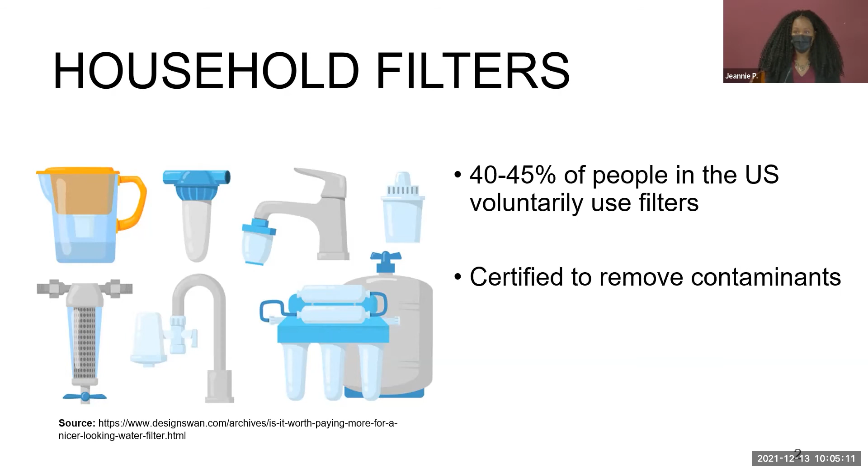They are certified to remove contaminants under NSF ANSI 42 for aesthetic effects. You will find iron and manganese under those, as well as chlorine. NSF ANSI 53 is certified for health effects, and lead certification is under NSF ANSI 53. For lead remediation, these POUs are used.

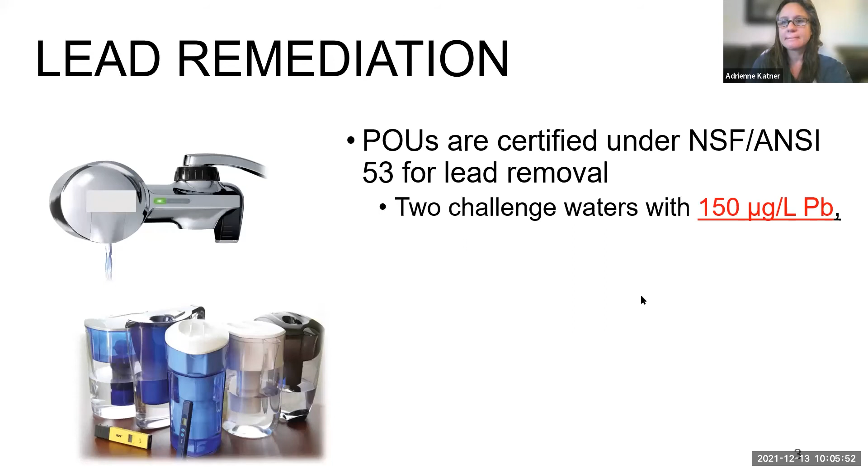All right, great. So our NSF ANSI 53 filters are for lead removal. They are tested with 2 challenge waters with 150 micrograms per liter of lead, a soluble and particulate condition. And these filters must remove... well, let's see.

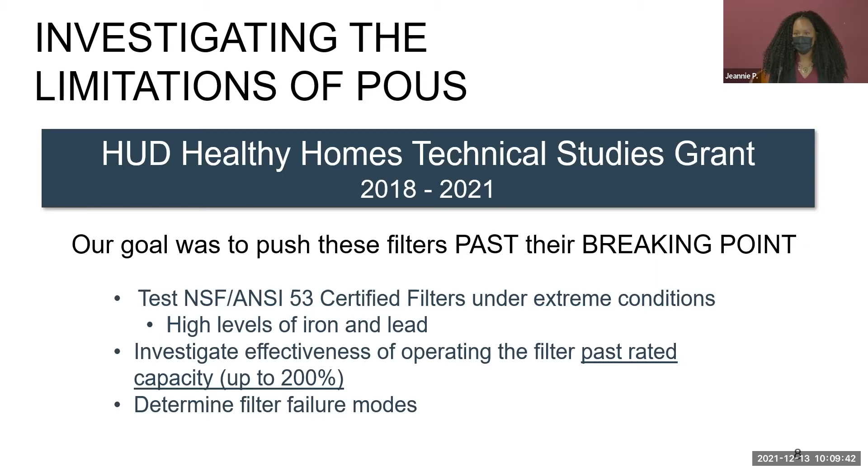Our testing was to test these filters under extreme conditions with high levels of iron and lead. We wanted to see their effectiveness when operated past their capacity, up to 200%, because people don't often change their filters on time, and to determine what the filter failure modes were when they are pushed purposely past their breaking point.

That was anticipatory because in 2019, after we had begun this work, Newark, New Jersey had a problem with unreliable filters. The EPA required them to switch from their 40,000 distributed filters to bottled water because two filters had elevated lead levels in a preliminary study. However, this was premature: when they did a citywide test of 198 homes, only 5 had elevated lead levels. So most filters worked, but residents had already been told not to trust them.

So there are ramifications when setting expectations for filter use. All these strategies for lead remediation have limitations, and my whole dissertation seeks to identify them. My first manuscript is understanding filter failure modes.

This investigation looked at when these point-of-use filters occasionally exceeded 10 micrograms per liter. My second manuscript looked at the impact of iron on POU performance, evaluating the limitations iron puts on these filters, especially when lead co-occurs in drinking water.

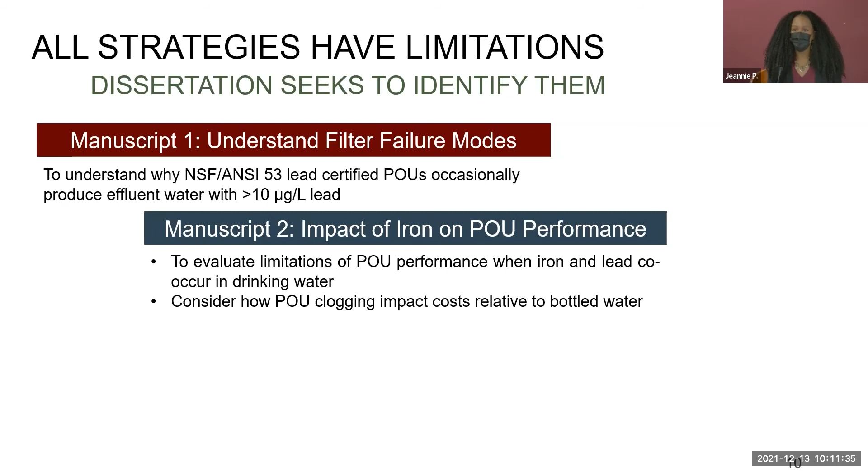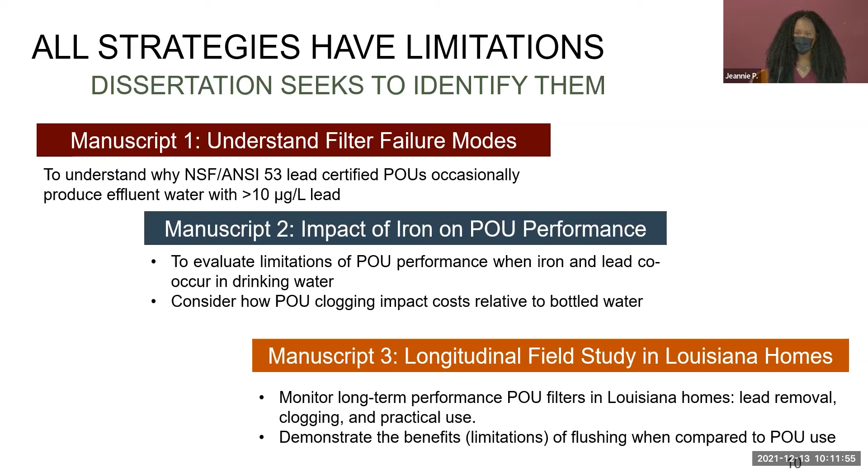The third manuscript is a longitudinal field study in Louisiana homes, as well as how clogging can impact the cost of POUs compared to bottled water. We wanted to look at the long-term performance of these filters regarding lead removal, clogging, and practical use, as well as demonstrate the benefits and limitations of flushing compared to using a POU filter.

Manuscript 1 is titled 'Understanding Failure Modes of NSF ANSI 53 Lead Certified Point of Use Pitcher and Faucet Filters.' It's a long title, but it's been published in ES&T Letters if you want to check that out. The objective is to understand when they potentially exceed 10 micrograms per liter. The first phase is a laboratory study where we tested the 2 NSF ANSI 53 water conditions, validating their performance in our lab to make sure our protocol was in line with theirs before making water that was purposely more challenging.

For the first condition, we tested the soluble condition with 10 POUs. The second was particulate lead water with 7 POUs. We did them in duplicate up to 200% of their capacity, with 16 samples for each POU, measuring their flow rate and effluent concentrations.

The next phase of this study was an examination of filter underperformance in the field, where we made 3 challenge waters of particulate lead to try to replicate the poor performance seen by a community. We had some brand A filters at our lab, and a partner lab had 2 brand A filters with really bad effluent lead levels we'd never seen before. So they shipped us their filters along with their water, and we wanted to see why those filters behaved differently.

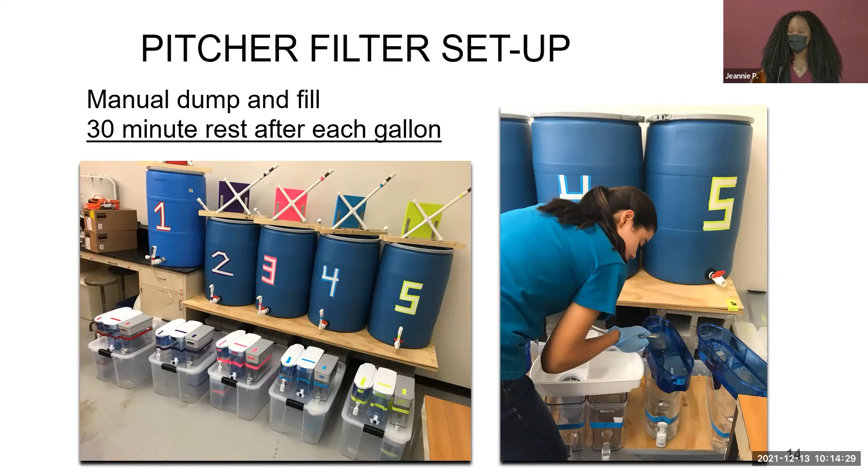For pitcher filters, this is a picture of my setup. This was manually done by awesome undergrads, who had to fill the pitchers, time them with stopwatches, and dump them. Between each gallon there was a 30-minute rest period, and we filtered as many gallons as we could in an 8-hour workday.

For faucet filters, this was an automated system rig that I built, with a 40-minute on, 40-minute off cycle—40 minutes being a lot longer than anybody would actually use their filter. I was really proud of this rig. The middle picture shows the overall setup, the left picture shows the plumbing hidden inside, and there's a 200-gallon tank we needed to make our water and filter it each day.

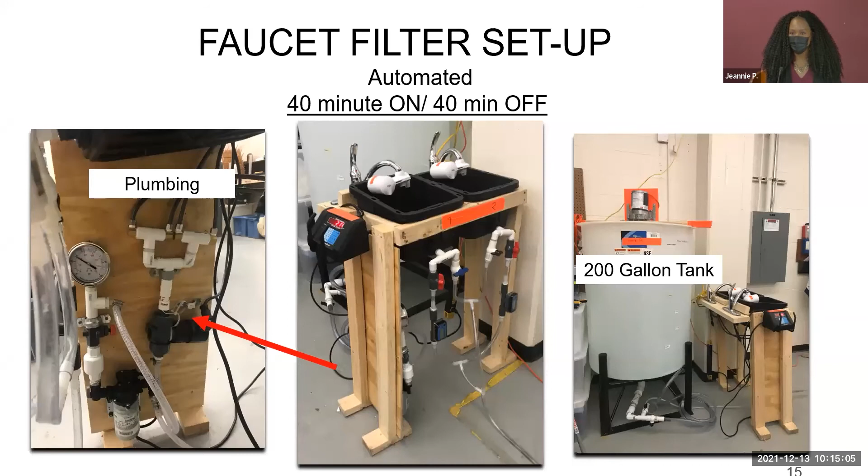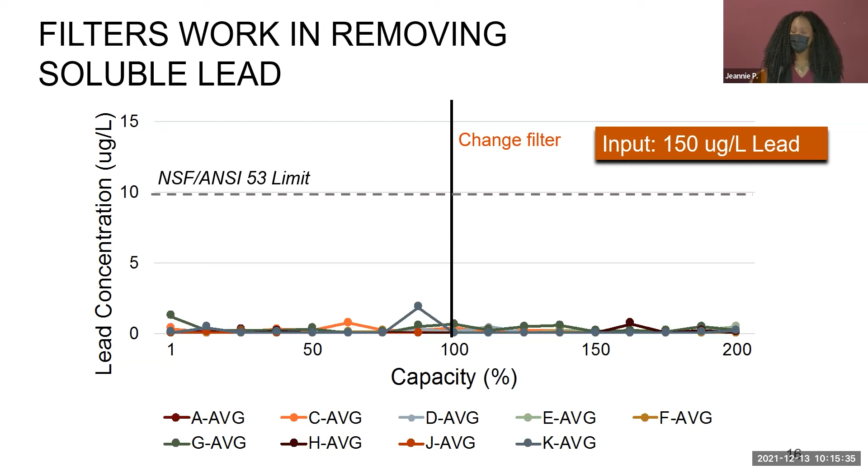And I forgot to let you know, the x-axis is percent capacity and the y-axis is your lead concentration, and that will be consistent over the course of these next few slides.

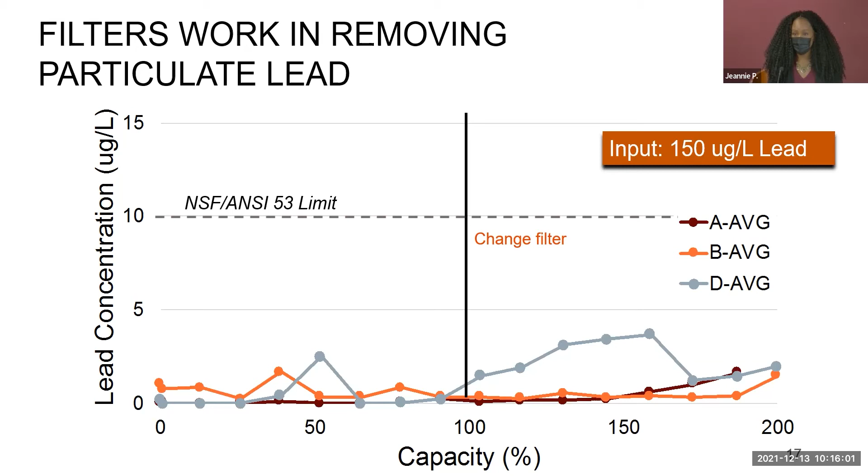The filters worked on particulate lead, but only 3 of them out of the 7 worked well when filtering particulate lead. For these filter brands, they all produce lead below 5 micrograms per liter, up to 200% of their capacity. I will be talking about the failure modes that we experienced with the other filters.

So we have modes of failure. We categorize them in 2 different ways: manufacturing, QA/QC, as well as performance. And performance is when lead levels exceed 10 micrograms per liter.

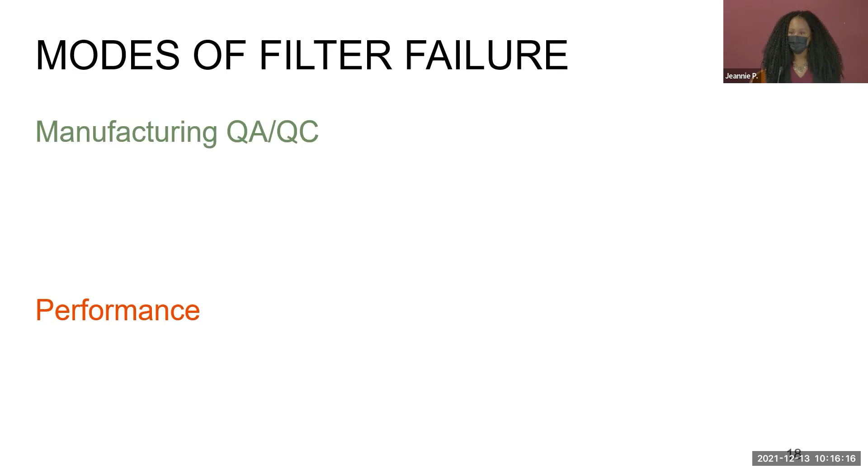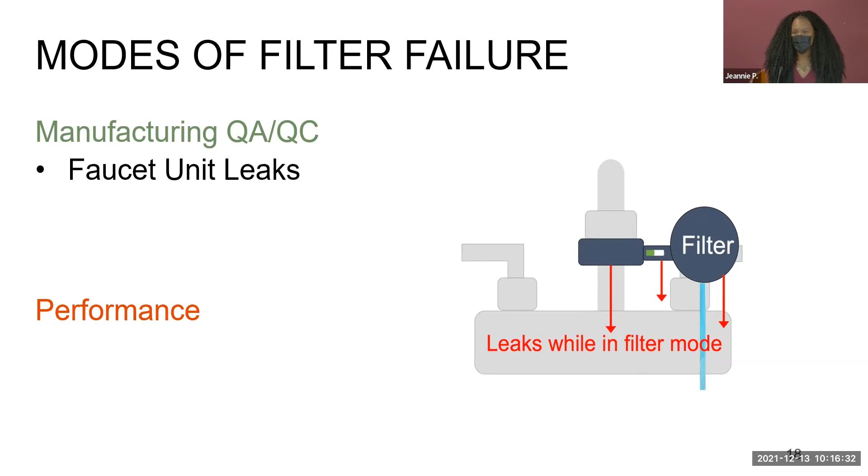One of the first manufacturing failures we had was that there were 2 brands of filters, and both of their duplicates, when installed running clean water, the units leaked in multiple locations. So before we could even test the soluble lead water, we had to replace those units.

The last manufacturing mode of failure is the duplicates. This one was pretty interesting. These filters came in the same box with the same lot number, and these are pitcher filters. The duplicate 1 removed all the soluble lead, however, it clogged at 88% of its capacity, so it didn't make it.

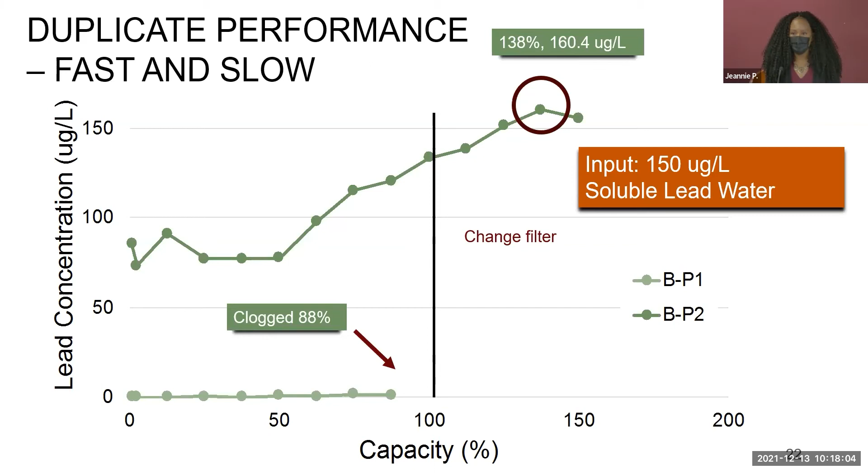While the other filter started off a whole lot faster than any time we tested it in our lab, and then it continued to get faster. When it first started, it only removed about 50% of the influent lead, and then by the time we got to 150% capacity, it was equivalent to the influent lead. In order to figure this out, we dissected the filters and we saw a hole inside of that filter.

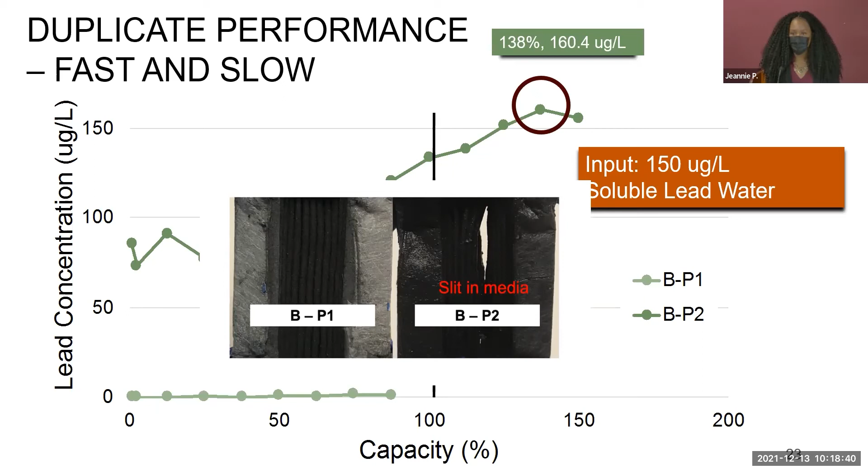Unfortunately, this isn't the first occurrence, and some of the consumer comments for these filters in their reviews, residents talk about the filters going really fast for some of them, and they did not make the water taste better. So they said they weren't going to use that brand anymore. So that's the manufacturing failure.

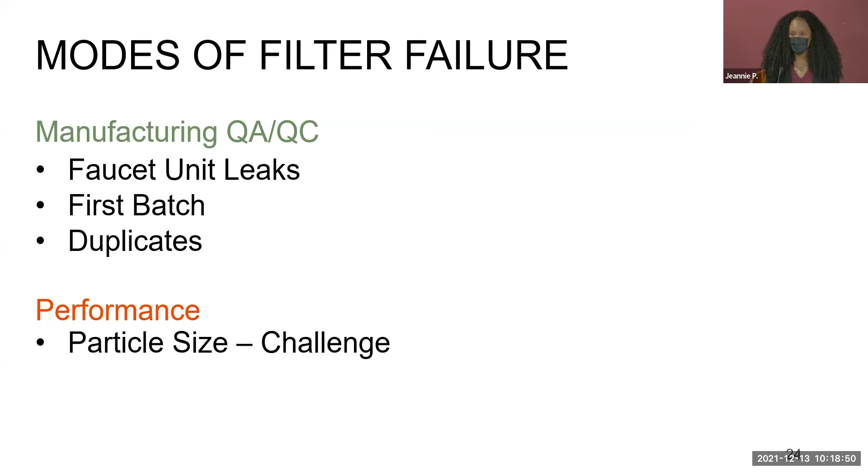And the performance failure, we attribute that to particle size of lead and that being challenging for the filters. So guys, bear with me, we're gonna get a little technical.

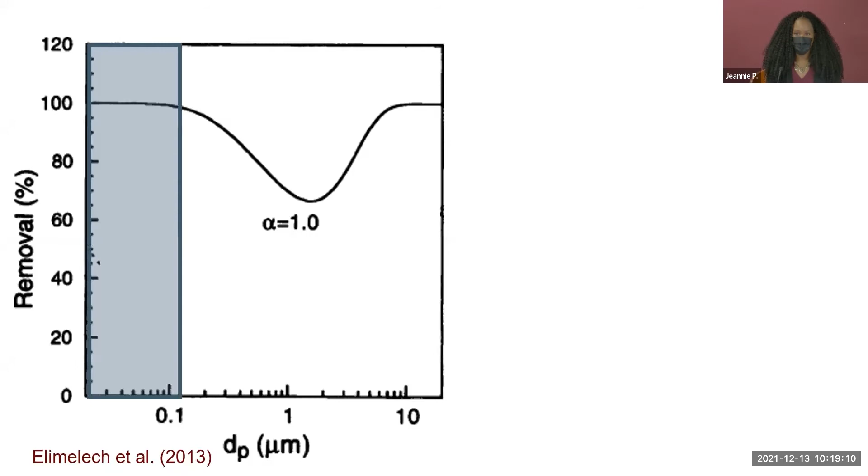Granular media filtration theory states that particle size may impact the removal of lead. On the x-axis, you have the size of the particulates, and on the y-axis, you have removal percent. When you have less than 0.1 microns, you have soluble lead, and it has a really high removal rate because it's not particulate and it will be taken care of by the filters.

In the next range, you have 5 microns and above. Those are highly removed because they're big particles. They can be removed by gravity or just the fact that they don't get through the media.

And then your removal begins to go down when looking at fine particles. In this range is what NSF focuses on for fine particulates, it's between 0.1 micron and 1.2 microns. Then you have your last range, which has the least percent removal, and that's between 1.2 to 5 micron when we're doing syringe filtering. But when looking at the theory, it's between 1 and 2 microns that is the lowest point when it comes to removal for filters.

When comparing our water to NSF's, we had total lead around 150 to 170, while theirs was 150. They required total particulate to be about 30%, and we ranged between 25 and 30. For fine particulate, they wanted it to be greater than 20%, and ours was between 0 and 20%, so a bit less than theirs for the fine particulates. And for the bigger particulates, they wanted it to be less than 80% in their water, while we had an average of about 94% of those bigger particulates in our water.

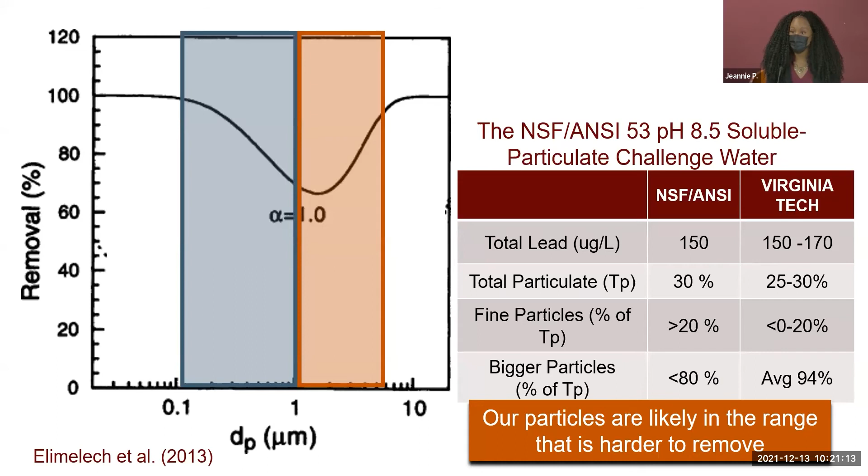So we believe that even with our particles being bigger, they're in the range that is harder to remove.

And the way that we did this was making our water slightly different. So our insoluble lead preparation—these are the steps on how we did it. We have our big tank of water that has soluble lead.

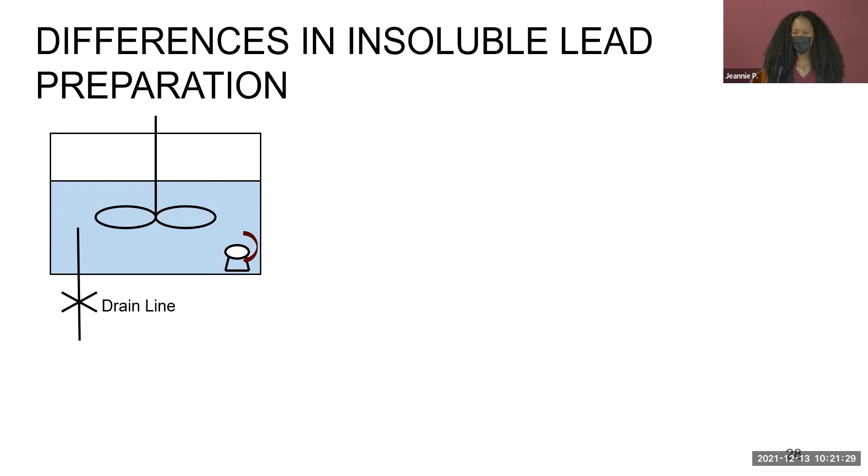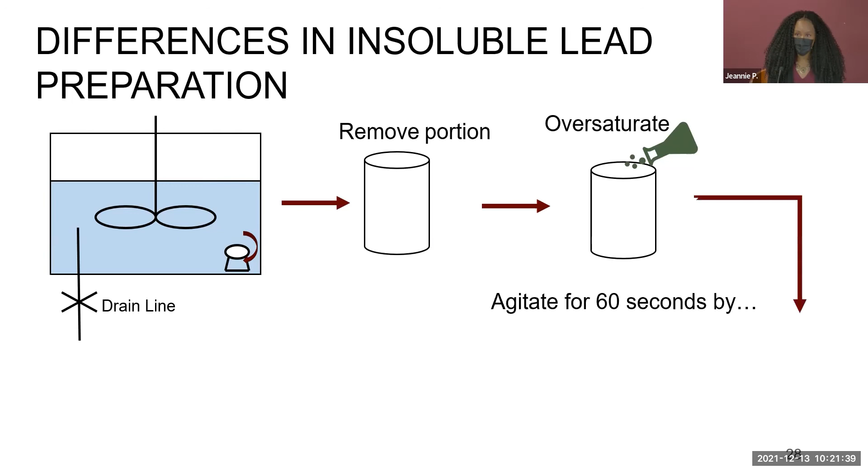We take out a portion, and then we oversaturate with a higher lead concentration. And then we agitate it for 60 seconds by either stirring it or shaking it in a container. And then we add it back to the tank and allow it to mix for a while in order for the particles to change their size.

And so when looking at the particle formation method, NSF stirs their particulates where we shake them in our methodology. And so when looking at their fine particulates, they had 70% of their particles in that range, where by shaking them, you decrease that to around 40%.

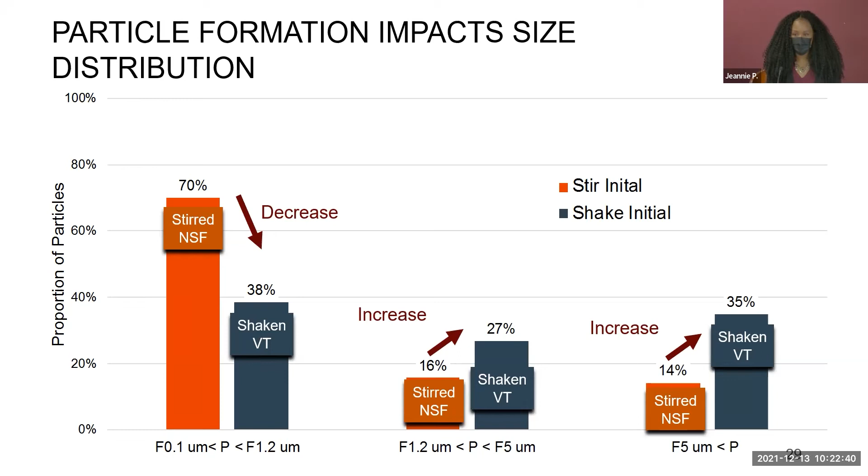And in the range that is most likely to be least likely to be removed, at 1.2 to 5 microns, you increase that percentage, as well as in the bigger particles, you increase that percentage. And so if you want to manipulate the size distribution of your particulate lead, then you would like to have them shaken and not stirred.

And the reason why I went through all of that theory is because of these results. So we talked about the fact that 4 out of the 7 filters did not perform well for particulate lead. We talked about the first one, which was the first batch failure. And now these are 3 different faucet filter brands.

Technically, for certification, all of these points should be below that NSF 53, 10 microgram per liter line. And that is not what we're seeing. And so the effluent lead levels, a lot of them for the different brands increase before even reaching filter capacity above that, and even above the 15 micrograms per liter for EPA certification.

And so for the brand K filter duplicate, it even got as high as 32 micrograms per liter of lead before reaching capacity. Even though that's about 75% reduction, it is a concerning result when it's supposed to be below 10.

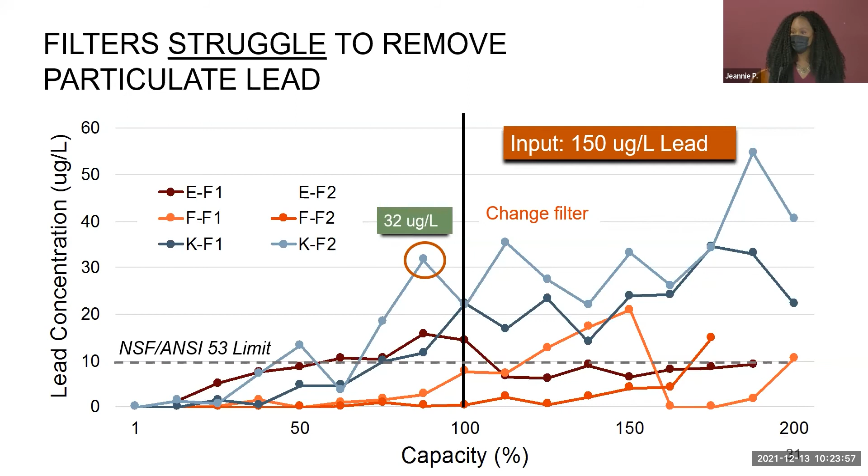And so for my second manuscript, we have iron clogging of lead certified point of use pitcher filters. And this is real samples of water that you have in some rural communities that have well water or are just on water systems that don't have the resources.

And so discolored water—lead does not have color. And discolored water is typically due to iron and manganese concentrations. And so when faced with this, are they still low cost, reliable options? Because we've received anecdotal reports from consumers that they won't use the filters because of clogging.

And the objective of this study was to look at the limitations of POU performance when tested with iron, and to consider how clogging impacts the cost relative to bottled water.

And so our phase 1 was laboratory testing of these POUs, which the technique is similar to the first paper, but we only tested 3 pitcher filter brands and 3 particulate iron water conditions. And then we had 2 iron and lead combination water conditions. One of them was soluble combination and one of them was particulate combination.

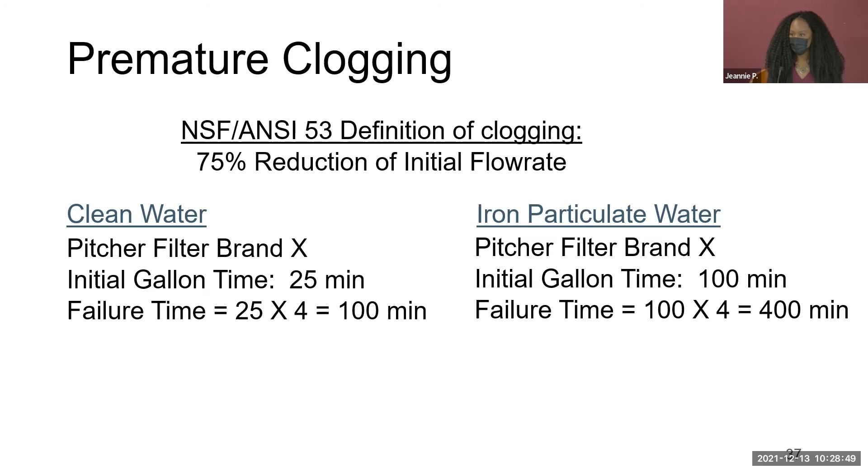And then iron particulate water, which is 0.3 milligrams per liter - these are real representative results. Your initial gallon can be a lot slower, so it can take that hour and 40 minutes to filter your first gallon. But in our lab, we could not declare failure until 4 times that - 400 minutes, roughly 6.6 hours to filter 1 gallon of water. We consider that to be unreasonably slow before capacity, and that's what we consider premature clogging.

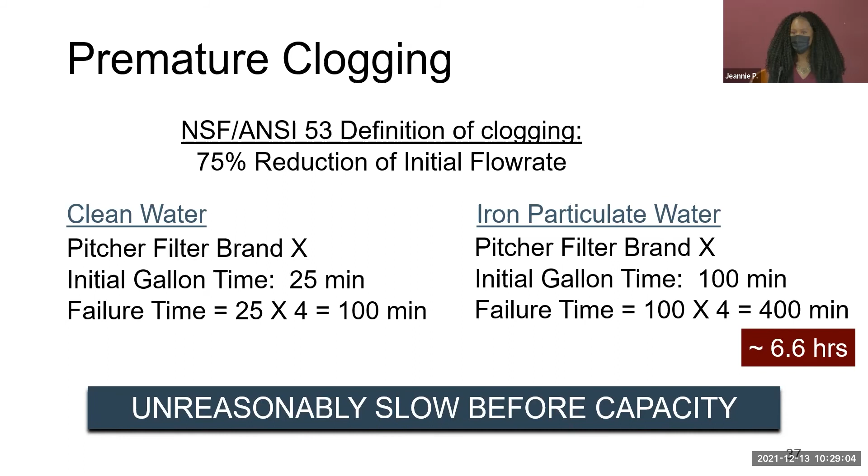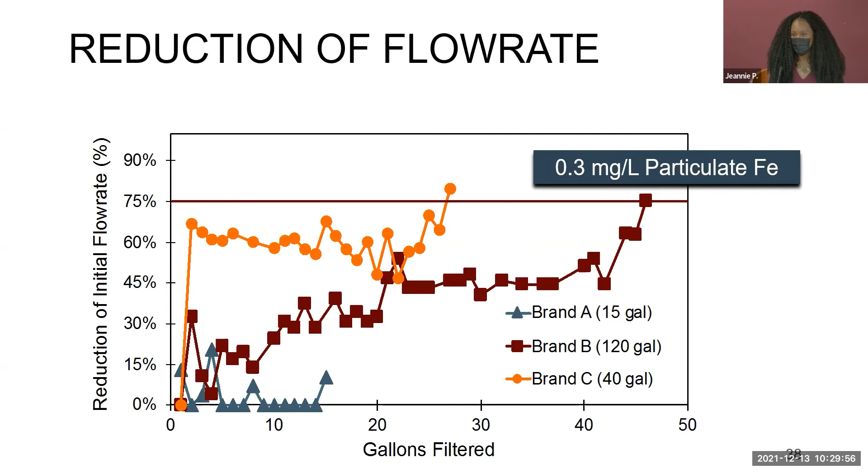Then looking at brand B, it had 120 gallon capacity. It did not make it to 50% of its capacity, but it treated more water than any of the others. And then brand C had a 40 gallon capacity and it treated about 25 gallons of water before reaching that failure point.

That third manuscript is titled 'Long-Term Performance of Faucet Mount Point of Use Water Filters in Louisiana Households,' and this is a longitudinal field study. The reason we're looking at this is because studies have proved that POUs are effective in both lab studies and field sampling. With their occasional failures, they still perform very, very well overall.

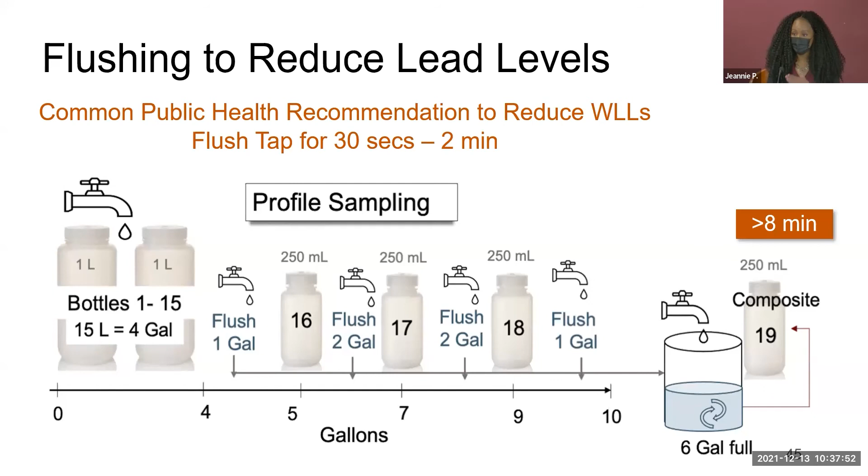The recommendation is 30 seconds to 2 minutes. This whole profiling is flushing over 8 minutes so that we can see periodically how much flushing you need in order to reduce lead levels.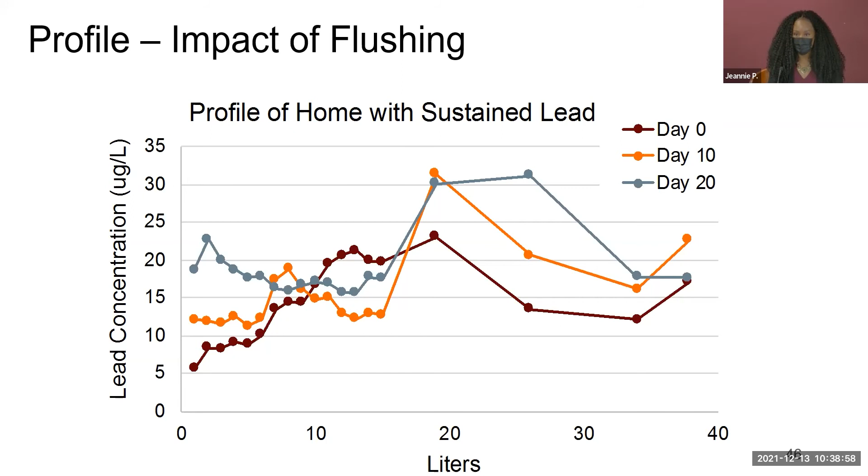The day 20 lead levels were a bit higher than day 0, and that is because normal water use in a home is about 120 gallons per day. We reduced that to 30 because no one was in the home, and lead levels increased due to that. So the POU performance in this home was pretty good.

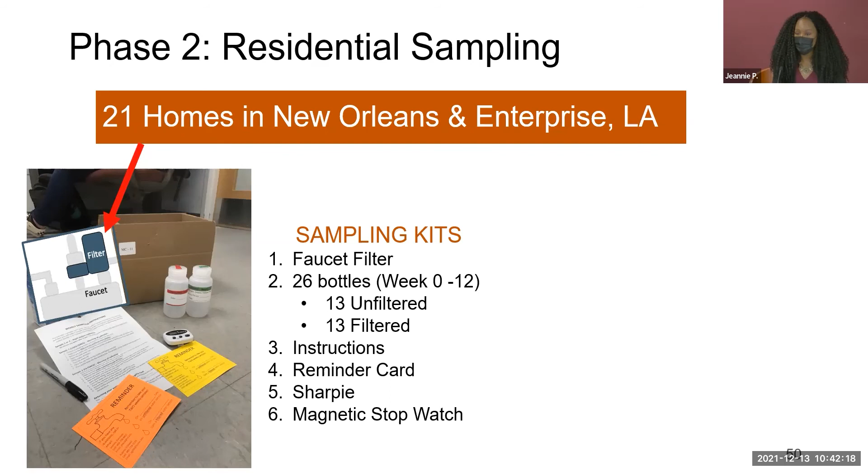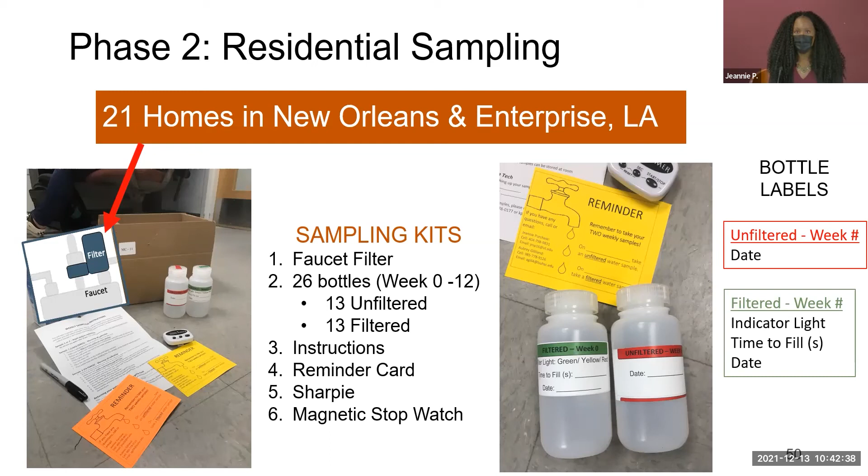They were sent sampling kits, which included a faucet filter and 26 bottles for weeks 0 to 12, if their filters made it that long. They were given instructions, reminder cards, Sharpies, and a magnetic stopwatch they could put on their refrigerator. Here's a closer look at their reminder card, where they took the unfiltered sample on one day of the week, and the following day took the filtered sample, after 6 hours of stagnation, which represents the worst levels of lead in a home.

When looking at the lead levels, Enterprise is the top box and New Orleans is the bottom box. Enterprise had median lead levels of about 1, but the filters reduced them to below detection. In New Orleans, median lead levels were still pretty low, but the filtered water was below detection, with an average of 96% removal, and all lead levels for all homes over all weeks were less than 1 microgram per liter.

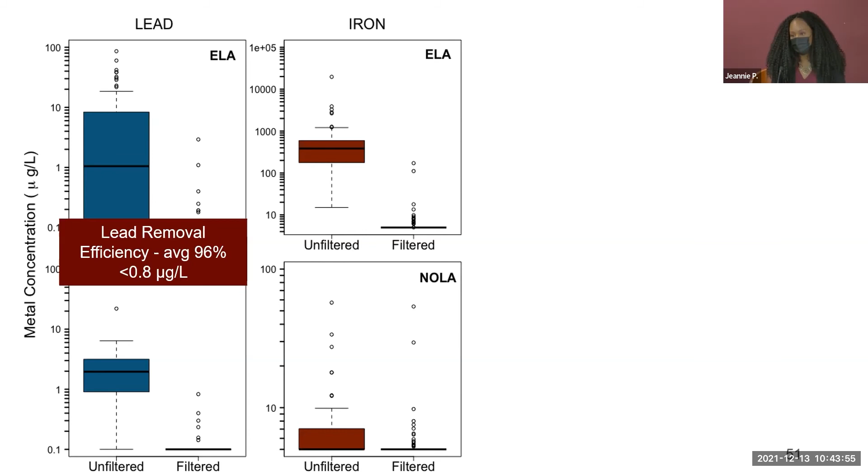Looking at iron, the median iron level for the Enterprise homes at the top is around 300, but the filters removed it down close to the detection limit. You see the contrast in New Orleans, where they barely had iron in their water, with a median at the detection limit, but the filter still removed all that was present. The removal efficiency, representative of Enterprise rather than New Orleans, was about 83%, and all samples were below 171, much lower than the 300 micrograms per liter secondary maximum contaminant level.

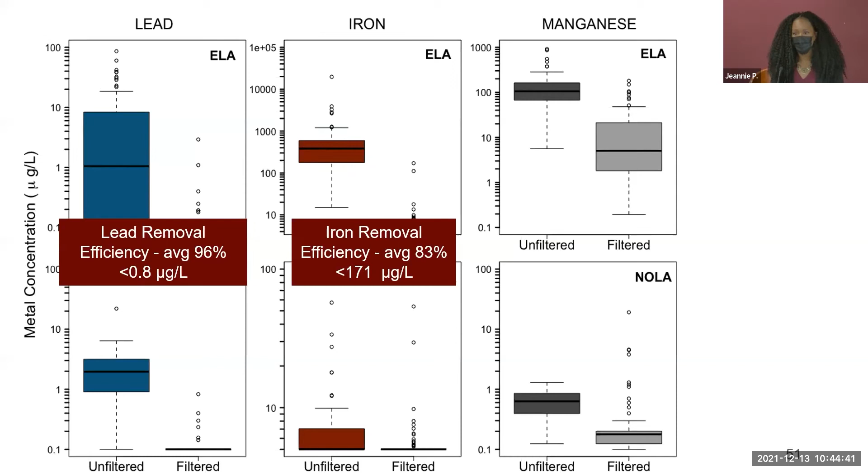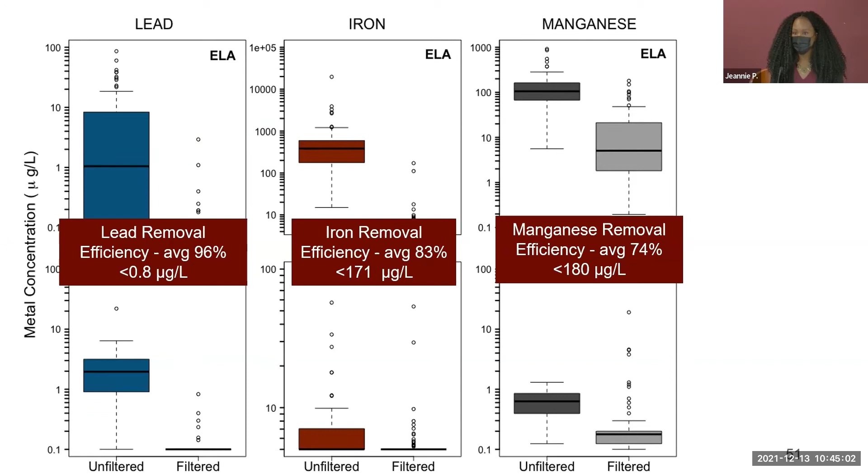We saw them start at different flow rates, measured in liters per minute, with the x-axis showing weeks. The variability in starting flow rate is based on factors like the water pressure in a home or their starting iron concentrations. That's the baseline the resident looks at when determining how the filter is supposed to work, and how slow it can go before they don't want to use it anymore.

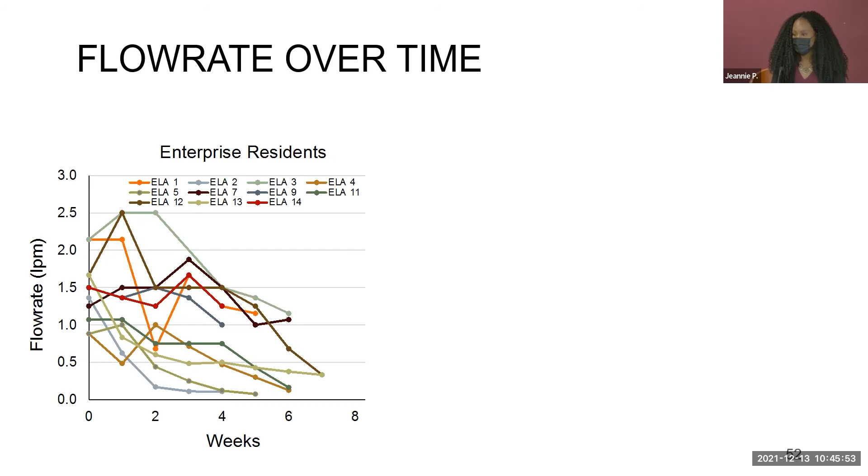As you can see in Enterprise, most of the filters did not reach 50% of their capacity, compared to the New Orleans homes, which had pretty high flow rates, and most of them did reach 100% capacity at 12 weeks. Even the homes that made it to 9 or 8 weeks, that was because of their filter light changing, so they did get the most use out of their filters.

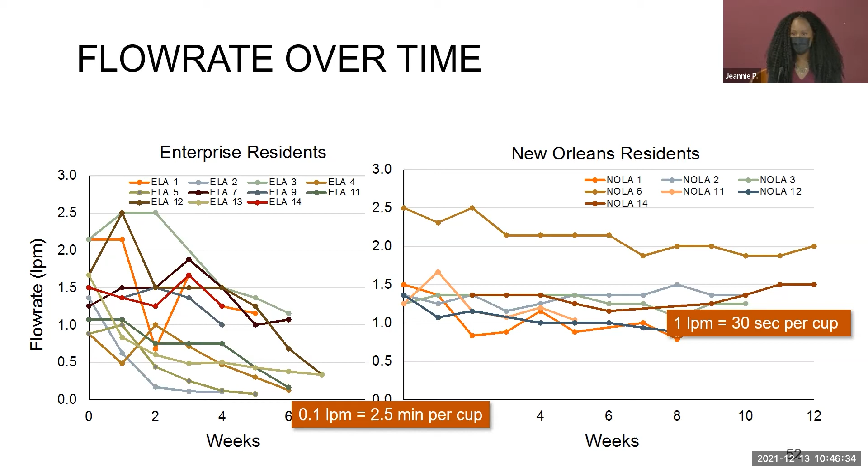To put this into perspective, 1 liter per minute, which is the line where both communities fluctuate around, is about 30 seconds to filter a cup. Some of the Enterprise residents at the very bottom had flow rates of 0.1 liters per minute, meaning they waited 2.5 minutes to filter a cup before they determined it was clogged.

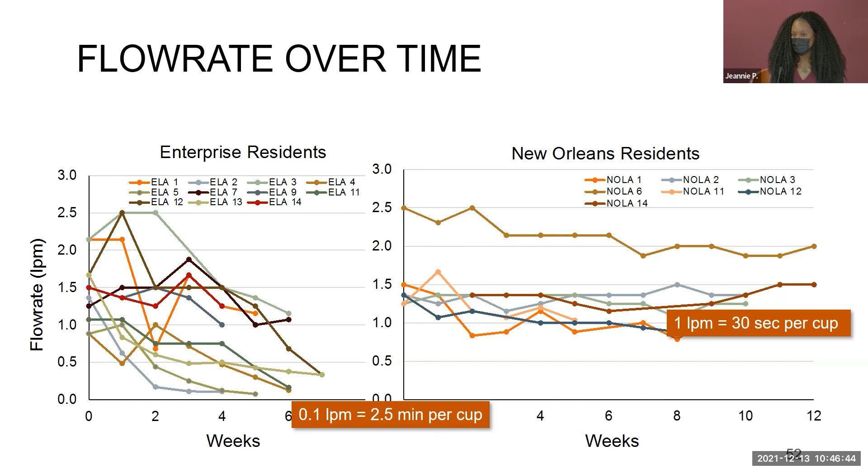Clogging, as defined in NSF ANSI 53, is a reduction of 75% of the initial flow rate. Looking at Enterprise, the average reduction in flow rate from initial before clogging is 62%.

But looking at the different residents, they chose differently. At ELA 1, our first bar, that was very close to that 75% reduction. But if you go all the way to Enterprise, or ELA 14, the short bar in the Enterprise series, they didn't wait that long to say their filter clogged. So the decisions on what clogging looks like are very different.

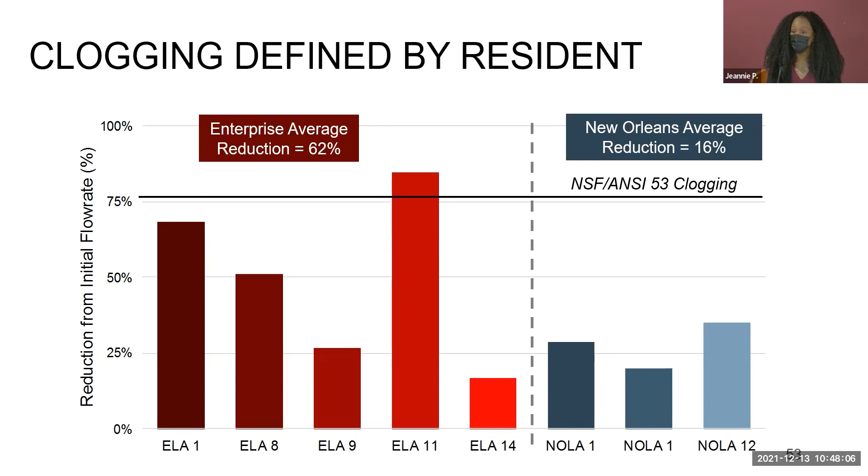In the homes in New Orleans, they only saw an average of 16% reduction before determining clogging, for the couple of homes that did say their filters clogged. They were actually a bit higher than the Enterprise home that said it clogged, Enterprise Home 14, but it's based off of their perspective and their use of the filter and how much water they use.

So we decided to try to control some of those variables in a lab study. We tested 2 duplicate filters that were the same as those used in the field study of Enterprise and the unoccupied homes. We wanted to see, as we increased our iron concentration, how much iron is required to reduce the flow rate. For filter 1, you had 23 milligrams of iron required to clog it, and for duplicate 2, 46.

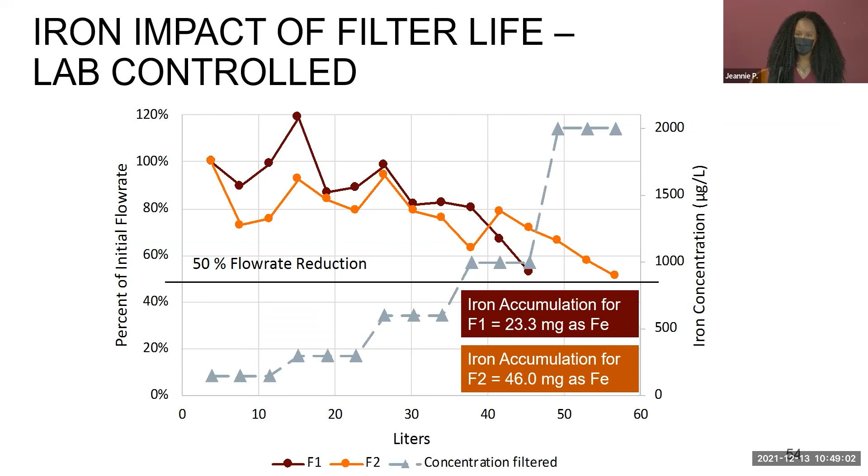That shows the variability, even if they were on the same rig, when it came to reducing the flow rate. Because you have the additional factor of not all filters being made the same, our prediction of iron's impact on filter life had a very low R-squared value of 0.56. So we know in general, based on the other data, that iron does impact the capacity when it comes to the weeks these filters are able to run.

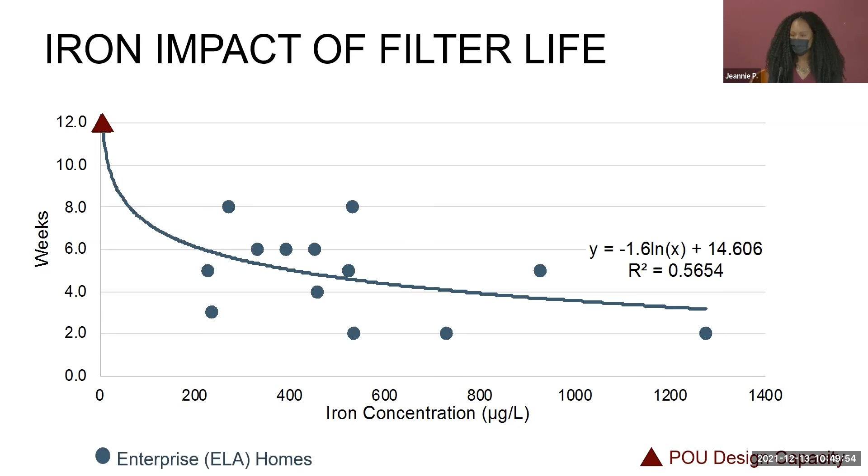But there are so many other things we aren't able to definitively say constitute clogging, or how we estimate it. We are able to say that iron is responsible for about 50% of the reasons why the filter clogs. So my conclusions: from manuscript 1, we validated the performance of the POUs, both positive and negative, in our field and lab studies.

We operated these filters to 200% capacity, and used them for a lot longer than normal people would, and that did not seem to have adverse effects on lead removal. Additionally, our POU failures, we attribute to manufacturing flaws and particulate lead.

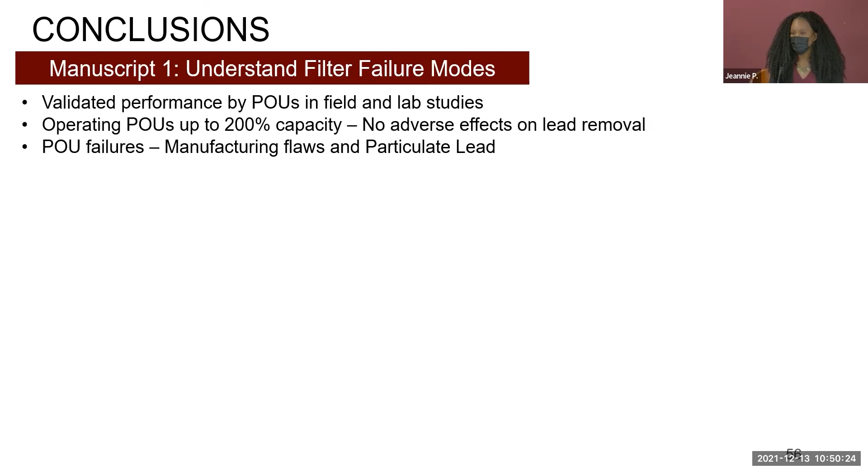Manuscript 2: we were able to validate the anecdotal reports of premature clogging from residents caused by iron concentrations. The POUs effectively remove both iron and lead, and we saw there isn't any adverse effect of the presence of iron on lead removal. We saw that clogging due to iron can cause the POUs to be more expensive than store brand water, as well as more of a pain if you have to wait several hours to filter a gallon.

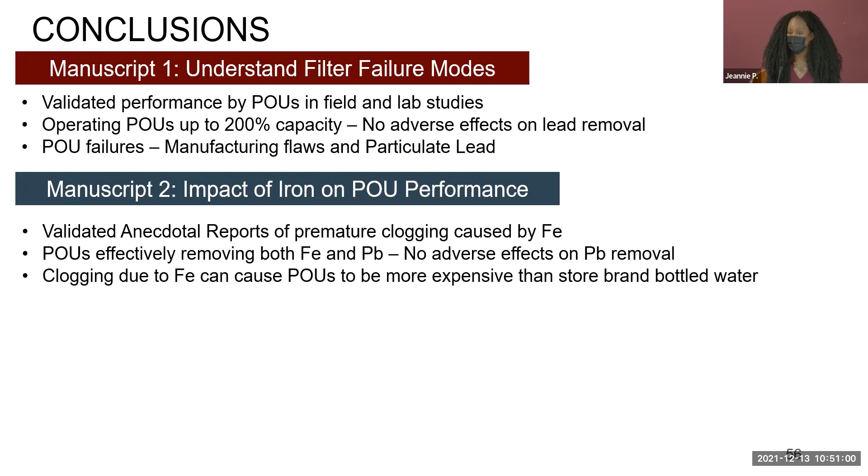For manuscript 3, for our longitudinal study, we saw that flushing did not lead to safe levels in our unoccupied homes. The POUs for the home with sustained lead had high removal. However, the one with the disturbed lead service line, the POU struggled, like we've seen in research that shows particulate lead can be an issue.

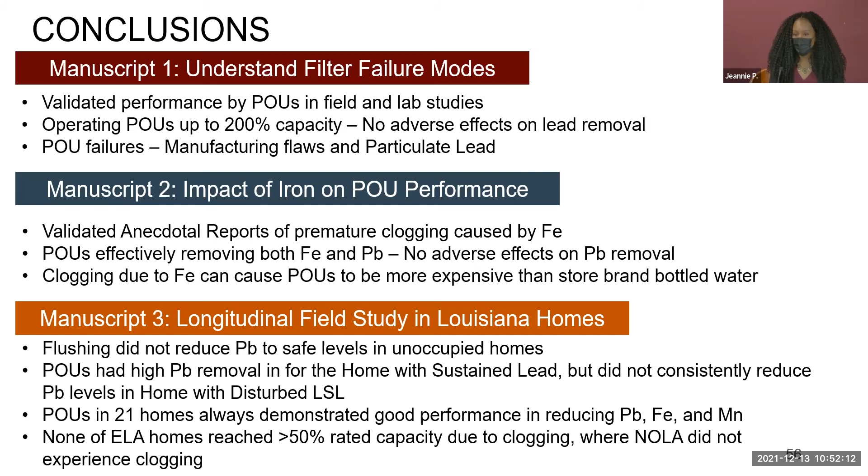The POUs in the 21 homes in Enterprise and New Orleans demonstrated good removal in reducing lead, iron, and manganese, but none of the Enterprise homes reached 50% of their capacity because they clogged. New Orleans did not have experience with clogging. That shows a big disparity, because small rural communities with high iron and manganese would essentially have to replace their filter 2 to 4 times to get as much filter life as communities like New Orleans with low iron and manganese.

So, recommendations for future work. The technologies have been improved. Since we started our study in 2018, the threshold for certification was decreased in the winter of 2019 from 10 to 5 micrograms per liter. So the filters you buy in the market now, we expect that they would perform better than the ones we had in our lab.

There are regulations, including the lead and copper rule revisions, that are advising municipalities and consumers to distribute these POUs to residents, but not all POUs work well for every community. So we encourage utilities to benefit from testing effectiveness, so they can determine which POU is best for their community specifically.

POU misuse is also a concern. Consumers are often advised not to use hot water in their filters; however, they do so anyway. When we told our residents, after installing their filters, not to use hot water, about 57% of them still used hot water through their filters. That can be expected, because we're asking them to use it for cooking and drinking, and we don't know the ramifications of using hot water when it comes to lead removal or what it does to a POU. So research needs to be done to understand the practical importance of not using hot water, so we can communicate that to residents.